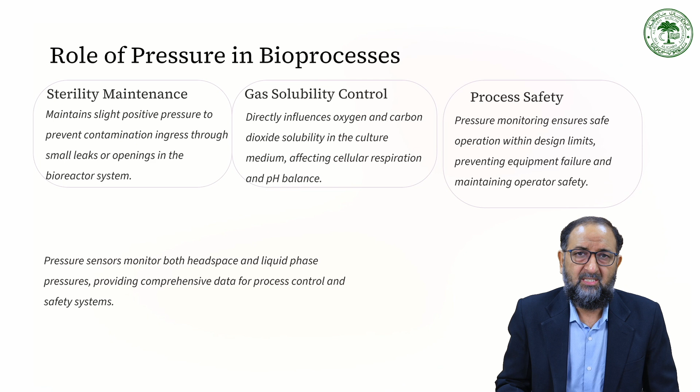And maintaining operator safety is also important - sometimes it can get a blast because of high pressure, so the operator may be at risk in that case. We should be very careful about the safety for the manpower as well as for the safety of the product. Therefore, pressure sensors are important, and pressure sensors monitoring both headspace and liquid phase pressures are required - they provide comprehensive data for process control and safety systems.

Now, the pressure control system precisely controls the pressure in the bioreactors, which affects everything from sterility and gas transfer to equipment integrity, in order to maintain that equipment for safety purposes.

Implementing the robust pressure management system, safeguard operations and optimization of critical biological reactions.

The pressure sensor is utilized for real-time monitoring, with various sensor types including piezo, piezoresistive, capacitive, and strain gauge. These are internal systems used to gauge or sense the pressure level and provide the display on the machine.

They provide accurate pressure reading to ensure process safety and prevent equipment damage. In that case, the equipment can also be protected.

A back pressure regulator is another category where you can sense the pressure's maintenance and maintain constant upstream pressure by precisely controlling the outflow, that is the outlet flow of the processed product or the nutrient inflow. This is essential for stable gas sparging, filtration, and chromatography, ensuring consistent process conditions of the bioprocess product. So in real-time manner, we can regulate the pressure through back pressure, and we can maintain the byproduct.

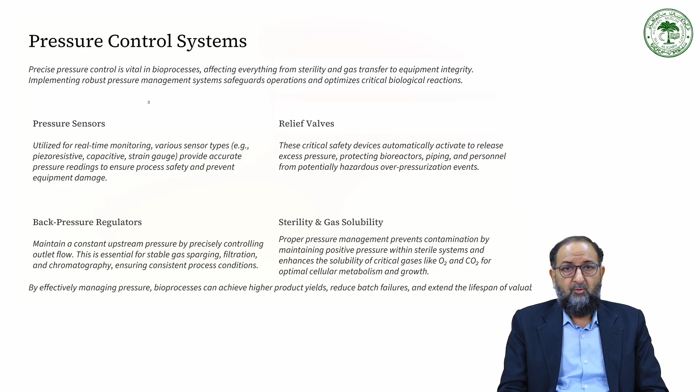The pressure control techniques where we can control the pressure include automated valve systems. These valves are made of different materials, and because temperature is also involved, the valve should not be damaged so that it continues functioning at the temperature at which the pressure is maintained.

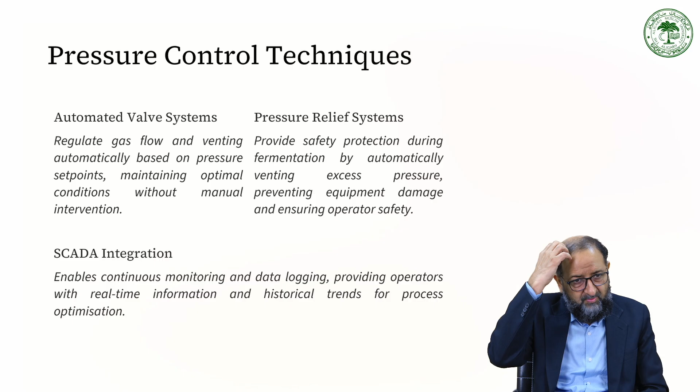For example, in case of an autoclave, we have gaskets, and these gaskets act as a valve. When we release the valve gas, the steam is released out. It's 100 degrees centigrade or even higher, 120 degrees centigrade temperature, so that valve material should be of such kind that it may not be affected.

So it regulates the gas flow and vents automatically based on pressure and set points of different types, maintaining optimal conditions without manual intervention.

Suppose if you keep manually maintaining the pressure, it might not be controlled as and when required. These machines are manufactured in such a way that they have sensors which are properly controlled for better sensitivity and accuracy, precisely detecting what pressure is required, and that's how we get automatic valves.

Whenever the pressure increases, the valve slightly releases the gas and the pressure. If the pressure is not maintained, take the example of a very homely pressure cooker. In a pressure cooker, although it is not an automated system but a manual one, they've still made a mechanism where there's a whistle on the top of the pressure cooker.

So when the pressure builds, the weight of these whistles is very important, and the valve maintained in the pressure cooker, the size of the valve and the amount of steam released from it, is very important. Accordingly, they design the pressure cooker. It's not like you can make any kind of weight - the weight has a certain meaning, and you cannot put any weight on this pressure cooker.

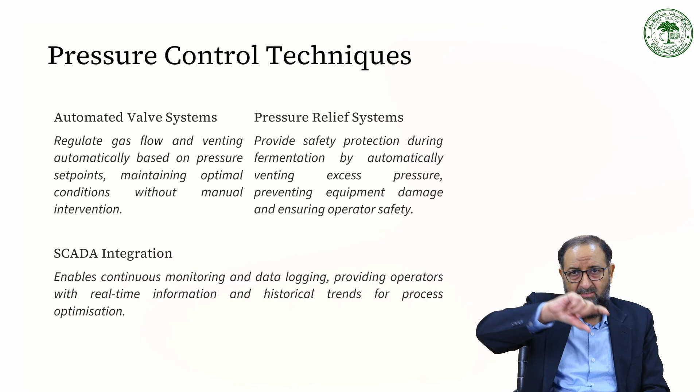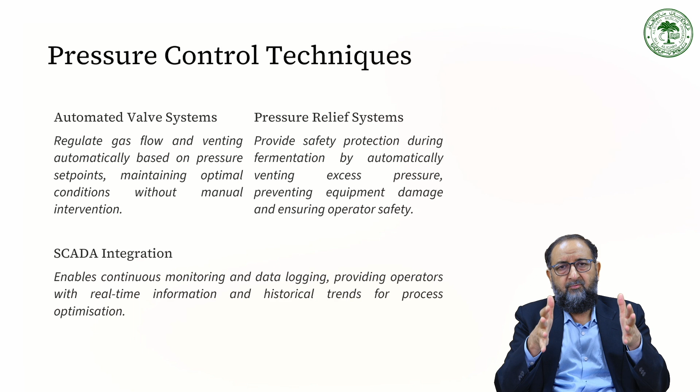So accordingly, at this temperature and pressure, what is the optimum product yield in this particular bioreactor system or pressure control technique? The operator can easily monitor, get an idea, and guess the condition where we can have the best quality product, so they can choose that.

Similarly, pH monitoring and control is again an important parameter in fermentation, because different bacteria may have optimum growth at different pH, and the nutrients and media used maintain a different pH.

If the pH slightly changes after product development or after excessive nutrients are put in the bioreactor, this imbalance or loss of balance will also affect growth. So maintaining the optimum pH ensures consistent, quality bioprocess product growth, efficiently and precisely.

Therefore, pH sensors are also important. Manually you can sense the pH through various devices, like pH strips which have gradients of pH on them. You just dip the stick, and it gives a slight change in color, allowing you to monitor the range of pH you are in and your product is.

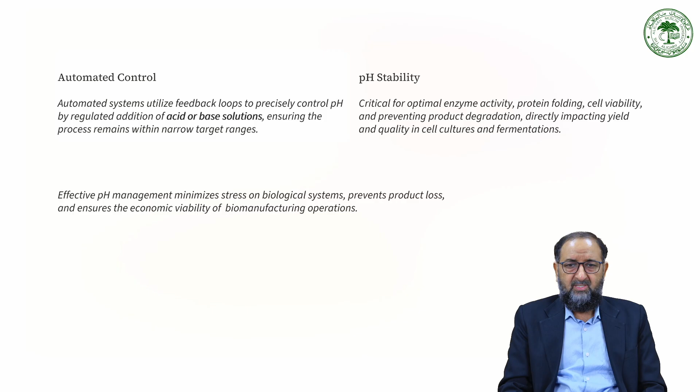This directly impacts the yield process. If pH is not properly maintained and keeps fluctuating or changing, it will directly impact the yield of the product, and besides yield, quality is also affected - a lower quality product may result. Effective pH management minimizes stress conditions on the biological system used for the bioprocess product, giving good product development if regulated properly. Otherwise, it's difficult to prevent product loss, and to ensure economic viability in biomanufacturing operations.

Now, dissolved oxygen is also important. In dissolved oxygen measurement, accurate measurement of oxygen is important, so certain sensors are required. The common sensors are optical sensors, mass spectroscopy sensors, and polarographic electrodes. Generally, polarographic electrodes are traditional robust sensors that consume oxygen, and can detect oxygen in the suspension, requiring frequent calibration, suitable for general bioreactor monitoring.

Whereas optical sensors are non-invasive with no oxygen consumption, offering faster response and reduced drift, ideal for precise long-term monitoring processes. These are used in various advanced bioreactors.

Mass spectroscopy provides highly accurate real-time multi-gas analysis for both dissolved and off-gas systems; this is complex and expensive, best for researchers and critical processes. In mass spectroscopy, you need a separate electrode and separate setup that can detect the dissolution of the gas through mass spectroscopy, giving you deflection signals on the machine or computer system, where you can detect the level of oxygen dissolved in the process. Either the dissolution leads to product formation, or affects the solution or suspension, giving different spectra.

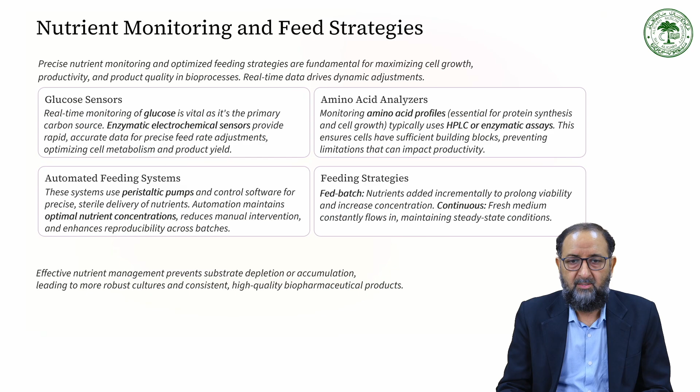Advanced sensor technologies - optical sensors, spectroscopy methods, and biosensors. All these sensors like near infrared sensors and Raman spectroscopy enable real-time monitoring. These are high technology setups at industrial level, where large quantities of bioprocess products are made, using both optical sensors and biosensors.

Nanotechnology, use of nano sensors are also regularly used in many cases. These biosensors incorporate biological recognition elements for highly specific detection of target compounds, offering exceptional selectivity for process monitoring applications.

Now we have data acquisition, and we call it a SCADA system. This is called automated data acquisition, where we have a mechanism, for example, you set data for temperature, pressure, pH required. That set data is already programmed into the machine, and we log this data. So this continuous automated system records the critical process, for example, when you run the fermenters or reactors - the temperature, dissolved oxygen, pressure. They provide a detailed audit of the data processing, and it ensures compliance of the process analysis.

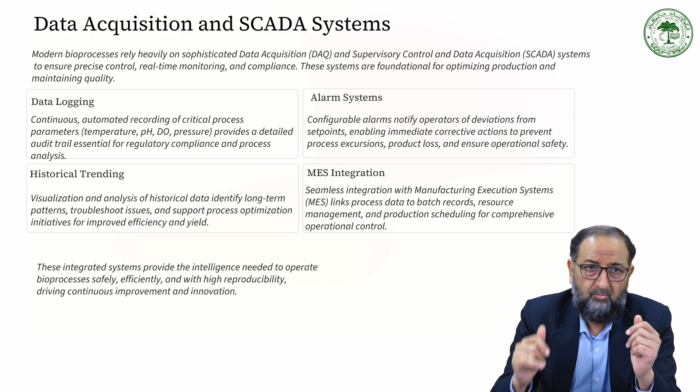Then there's seamless integration of the manufacturing execution system - how to execute the manufacturing system, which we call MES - linking the process data and batch record. So what is the data of a particular batch, what is the role of that batch, and how the batch was run. All this data processing can be controlled through this data acquisition and SCADA system.

Now, PID control system - we have proportional and integral, responding to the current errors. A large difference between the set point and the process variable results in a stronger corrective action, providing a quick initial response, but it can lead to a persistent offset.

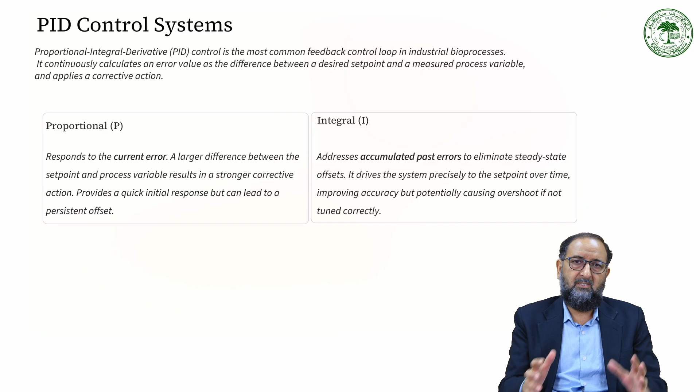The integral addresses accumulated past errors. So this PID - proportional, integral, derivative - control system is the most common feedback control. It provides feedback in a control loop for industrial processing of the product, giving the parameters required for processing, how the product was maintained, the yield, quality and quantity, and what parameters were used to get these yields. All these things give you feedback through the control system, and you can send signals to the SCADA and get the data generated. From the data, signals tell you this is the best quality product, and under this condition, you opt for it for several batches.

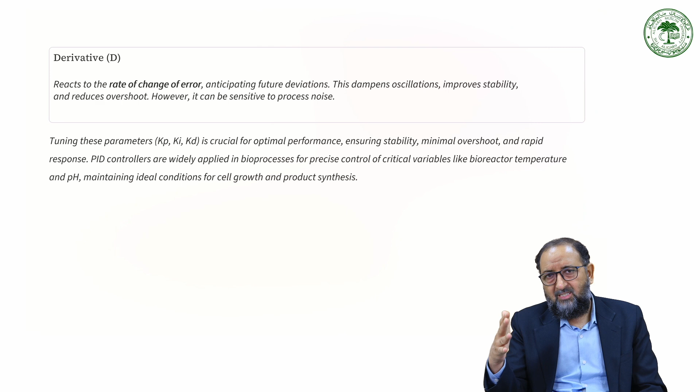This third one is the derivative - it reacts to the rate of change of errors, anticipating future deviation. You can simulate future deviation based on the data, extrapolate things, and look into the possibility of changing conditions to get the best quality.

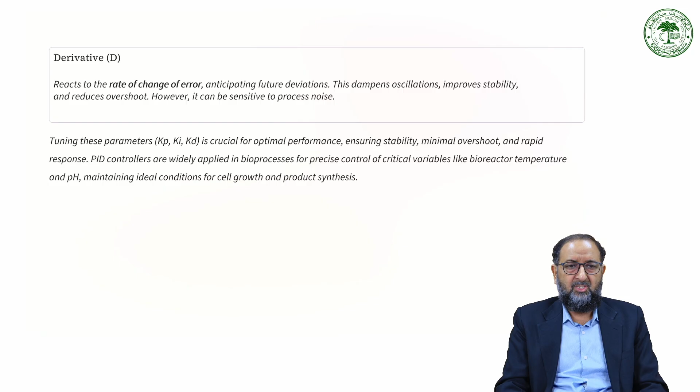So the bottom line is how you get the best quality data through these things - dampening oscillations, improving stability, reducing overshoot, and sensitivity to process noise. Tuning these parameters - Kp, Ki, Kd for proportional, integral, derivative - is crucial for optimal performance, ensuring stability, minimal overshoot, and rapid response. This is the best and most ideal system for bioprocessing. PID control is required for precisely maintaining and regulating bioprocessing to get the best quality product.